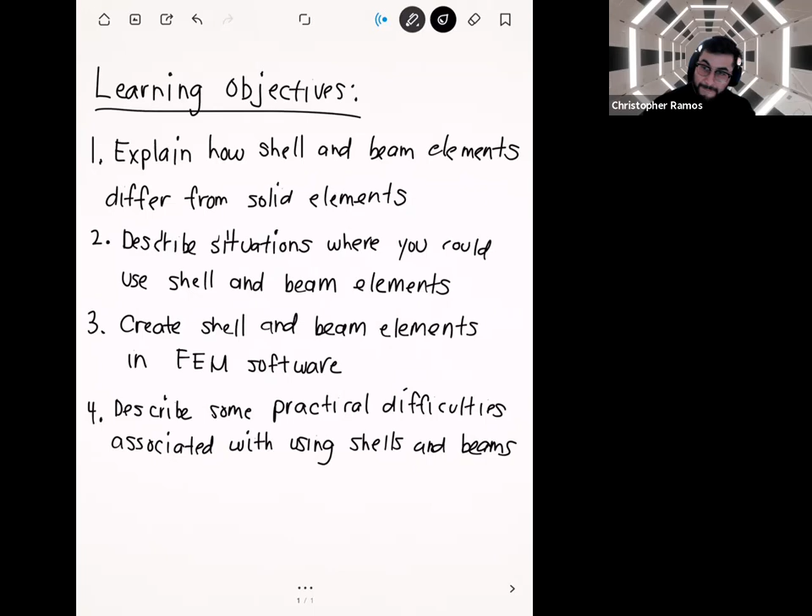That's cool, I didn't know Porter Robinson was playing. Yeah, my fiance said they announced this one kind of last minute. I think he played Friday and Saturday. Would you say it's kind of like EDM music now? Yeah, I mean when my fiance plays it, I enjoy it, but I usually won't listen to it on my own probably.

Man, I haven't smelled that much weed in a long time though. Yeah, I feel like I woke up the next day getting like a secondhand high just from smelling all the smoke there.

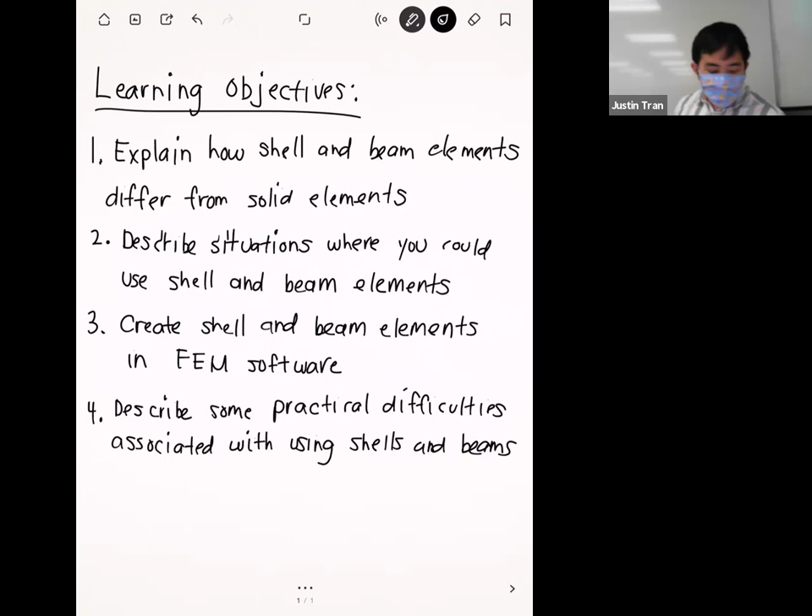The topic for today is shell and beam elements. And my stylus is not working well.

Last week we started talking about different element types, and went over all the different shapes you can have in 3D and in 2D. From here on out, I'm going to assume we're strictly working in 3D, so you'll hear me use the term solid elements. By solid elements, I mean elements that have 3 dimensions of space. In 3D, our solid element types are tetrahedrons - both linear and quadratic versions - and also hexahedrons. They're called solid elements because they actually have 3 dimensions of space.

Shell and beam elements are going to be a little bit different than that. Let me start by talking about the situations where you want to use solid elements, because solid elements are basically 3-dimensional shapes themselves.

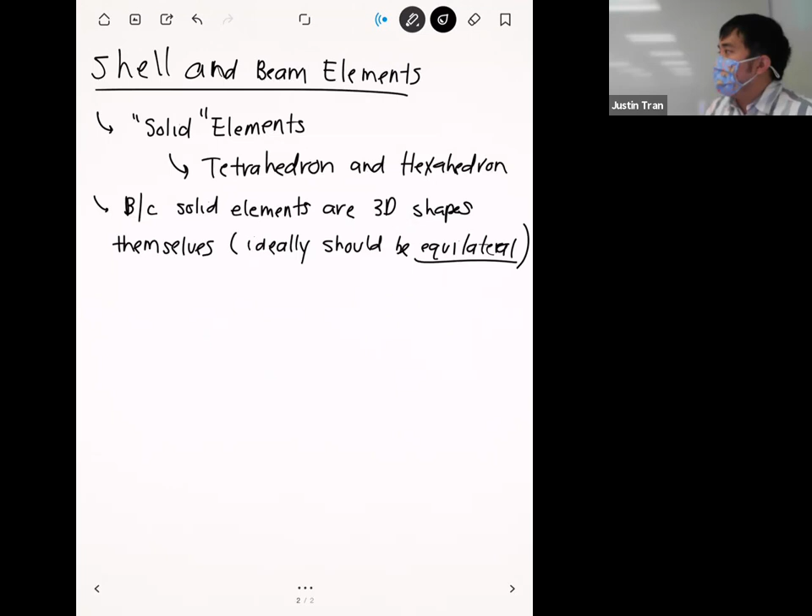Remember when we were talking about mesh quality, we said that ideally you'd want elements to be as equilateral as possible - meaning all the edges, sides, and faces are roughly the same size. Naturally, these elements work well to mesh geometries that are also kind of roughly equilateral.

What I mean is that if you take your object and measure the dimensions in the x direction, the y direction, and the z direction, you're going to get all roughly the same number. It doesn't have to be exactly the same, but they should be in the same ballpark.

If you look at the geometrical properties of your CAD model after opening it up in ANSYS, there's a property called the bounding box - it takes your geometry and draws the smallest possible box that fits around your entire geometry. So when I say your object is roughly equilateral in each dimension, one way to easily check that is the bounding box. If the dimensions of this box are roughly the same magnitude, or at least the same order of magnitude, then it's probably a good object to use solid elements for.

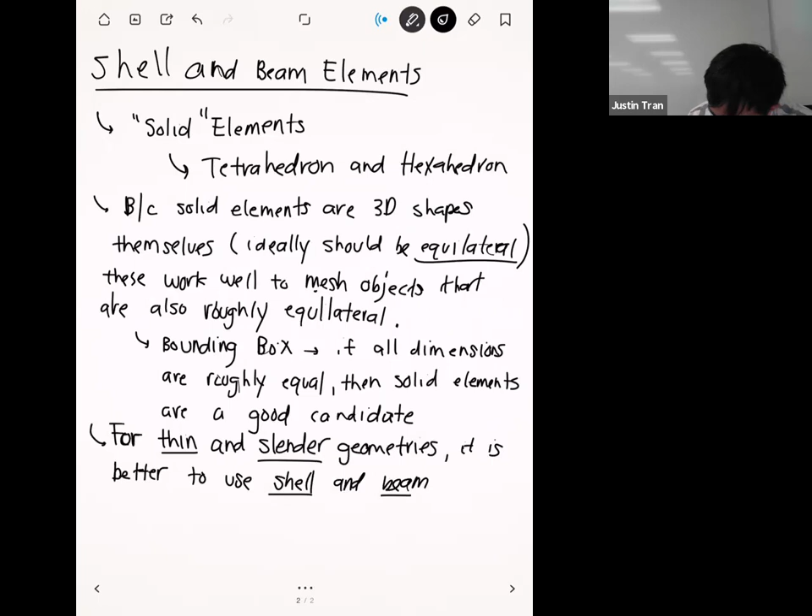The reason for that is, these shell and beam elements are kind of naturally suited to the geometry that you're trying to model. So, from here on, we'll define what shell elements look like, what beam elements look like, and what properties they have that make them really suitable to mesh these certain kinds of geometries.

Thin inner diameter, like thin thicknesses compared to inner diameter and outer diameter. Yeah, no, it's a good question. So yeah, shells are actually a great way to do those kinds of things - you're talking like maybe a thin walled pipe where the inner diameter and outer diameter are very close. Yeah, that's a great candidate for a shell too.

Actually, I did a little bit of research on that when I was in grad school too, where I did simulations of blood vessels, and blood vessels are another type of pipe where the inner diameter and outer diameter are pretty close to each other. So I was actually doing some research where I was trying to use shells to model how the blood vessels kind of breathe in response to blood pressure. So yeah, it's because it's used a lot in pipe flow, and so it makes a lot of natural sense to use it for blood vessels too.

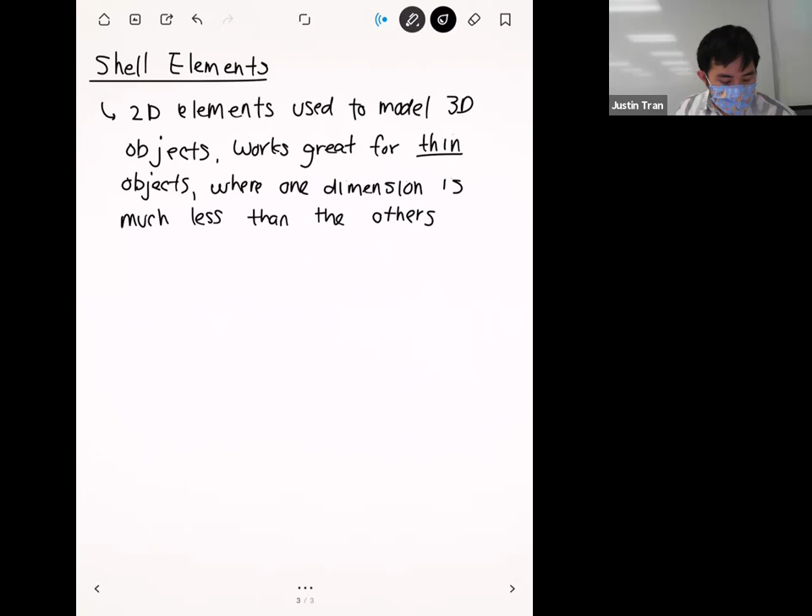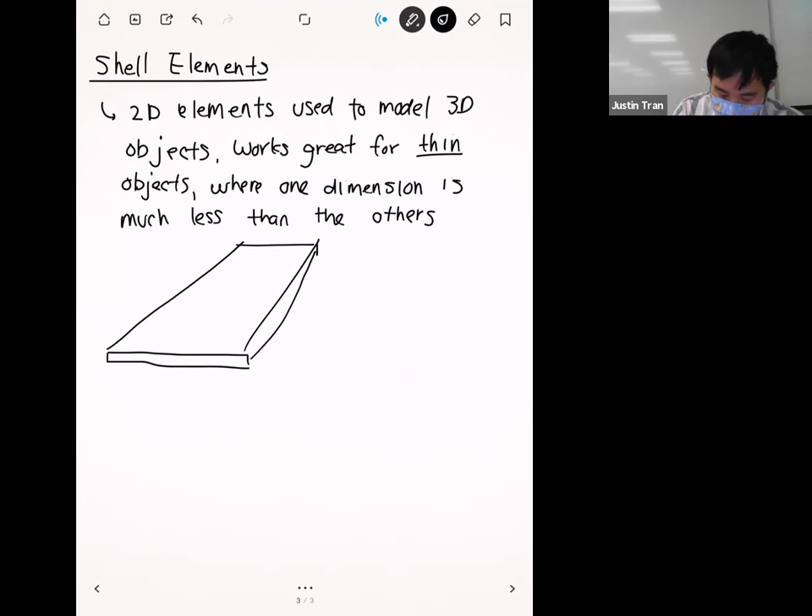I think kind of the canonical example of this is a thin sheet of metal. Let's say that you have a piece of sheet metal here, and let's say that's really thin. So maybe the thickness of the sheet metal might be like, maybe a quarter inch, maybe an eighth of an inch, but it's much longer than it is thick. Let's say that your length here is on the order of meters, and the width here maybe is also on the order of meters.

So what shell elements do is that instead of having this modeled as a 3-dimensional object, we can instead model it as a 2-dimensional sheet. And then we can break up the sheet into 2D elements.

Whereas if we broke up the sheet into 3D elements, maybe it looks something like this - let's say that here we use 3D hexahedrons, whereas here we use 2D quadrilaterals. Let's say that we use the same number of elements in both cases, and imagine that the checker pattern is the same. The one that's going to be cheaper here is actually going to be this one.

Because on a per node basis - and we saw this last week when we were looking at the number of nodes and the number of functions - this is going to be cheaper here. And kind of the magic of shell and beam elements is that in addition to being cheaper, it's actually going to be more accurate too, believe it or not.

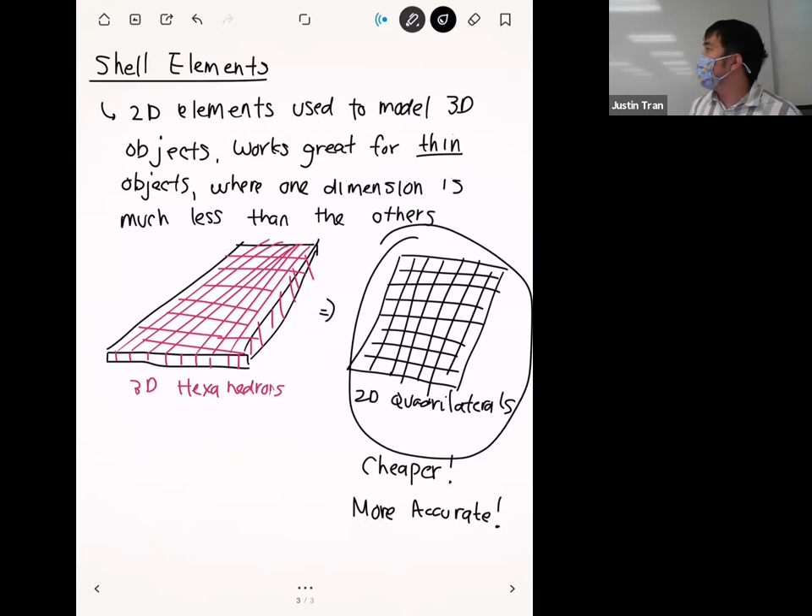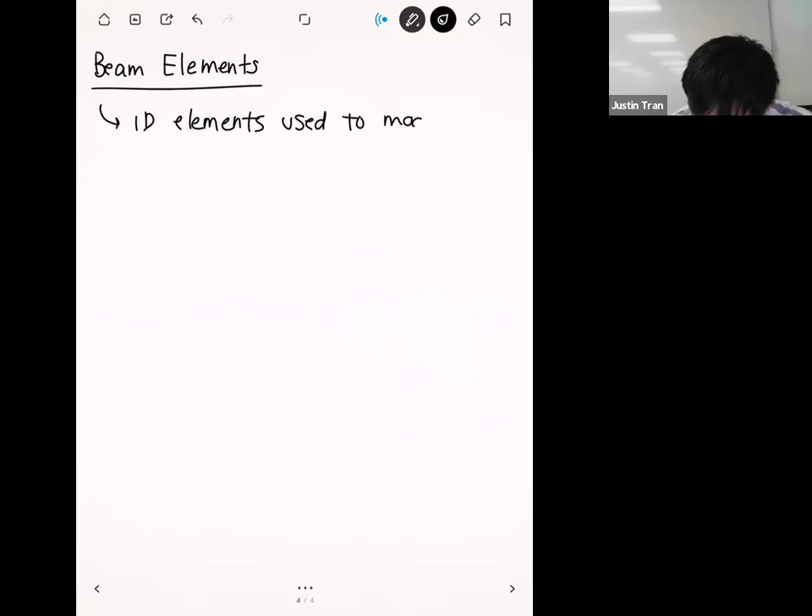All right, so let's talk about beams. So if shell elements are 2D elements used to model 3D objects, beams are going to be 1D elements that we're going to use to model 3D objects. The class of 3D objects that we use beams for are slender geometries.

And so what does slender mean? Slender basically means that you have one length dimension in your object that's much greater than the other two.

And so it looks like a literal beam. If you think of a structural beam for a structure, you have one dimension, the length of the beam, that's much greater than the height or the width of that beam. Just right in front of me, this stylus I'm using would be a great candidate for a beam element because the length of the stylus is like this much, but if you look at the cross section, it's way smaller than that.

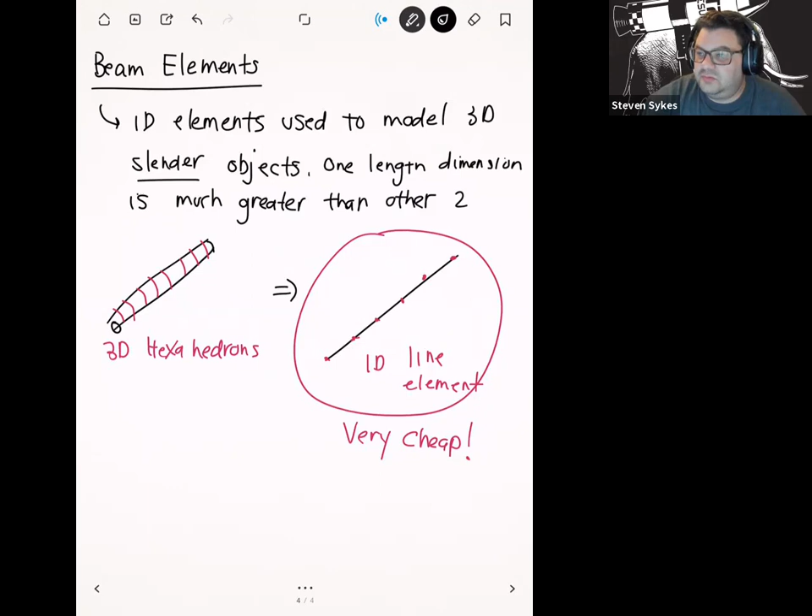Question: is the accuracy about the same for a 1D line element versus 3D hexes? For most cases, on a per cost basis, the 1D line element is actually going to be more accurate, and we'll talk about why on the next page. When you have these thin and slender geometries, there's a very interesting effect where it gets really difficult to compute stresses accurately unless you refine to a crazy amount.

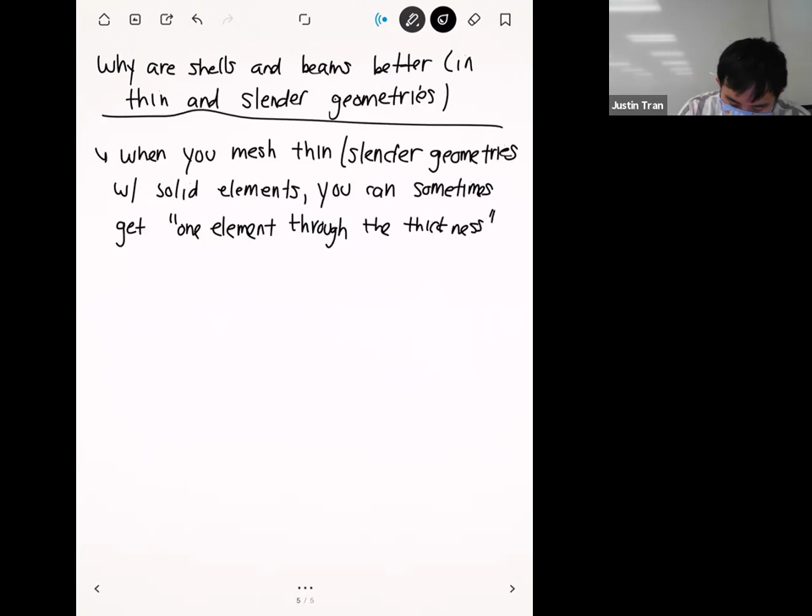Let me draw a thin sheet, just like we did before. By one element through the thickness, I mean that if you put, say, a hexahedral mesh on this plate, your hexahedral mesh is likely going to look something like this, unless you refine it to some crazy amount.

If you look at the mesh density in this direction, we have pretty good mesh density, because if you count the number of elements going across that dimension, let's say we have 1, 2, 3, 4, 5—so 5 elements in this direction. Now let's count the elements in this direction: 1, 2, 3, 4, 5, 6, 7, 8. That's pretty good—even in this simplified example, we're getting good mesh density.

But if you count the number of elements in this height direction, we only have 1. And this is a situation that you actually want to avoid most of the time.

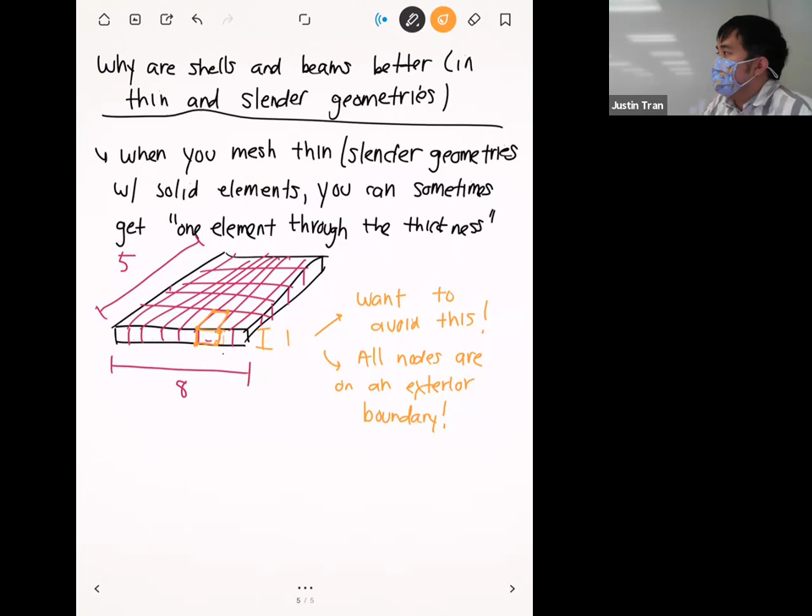So for the last activity that we did, we did a signpost analysis, right? And actually in that one, you have a prime example for both a shell and a beam. For the rectangular sign, that's a fairly thin geometry, so you could reasonably use a shell for that. And then for the post itself, it's fairly slender, much longer than it is wide. In that case, we had a cylindrical post, and the diameter of that post was much less than the length.

And I thought about that too, but I wanted to focus on other things in that example. But you can definitely do that activity with shells and beams, and you'd actually achieve an accurate solution with much less elements than what you did for that activity.

All right, so when you only have one element through the thickness like this, you're going to have a bunch of nodes in the same element, all of it on the boundary. Or another way to say this is that you're not going to have any interior nodes.

And that can be kind of dangerous because what can happen is that when you're just solving for the deformations, you could have a situation where you have a boundary condition applied on the top right here, and then a different boundary condition applied on the bottom. So you're going to have one element that's sandwiched between these two boundary conditions.

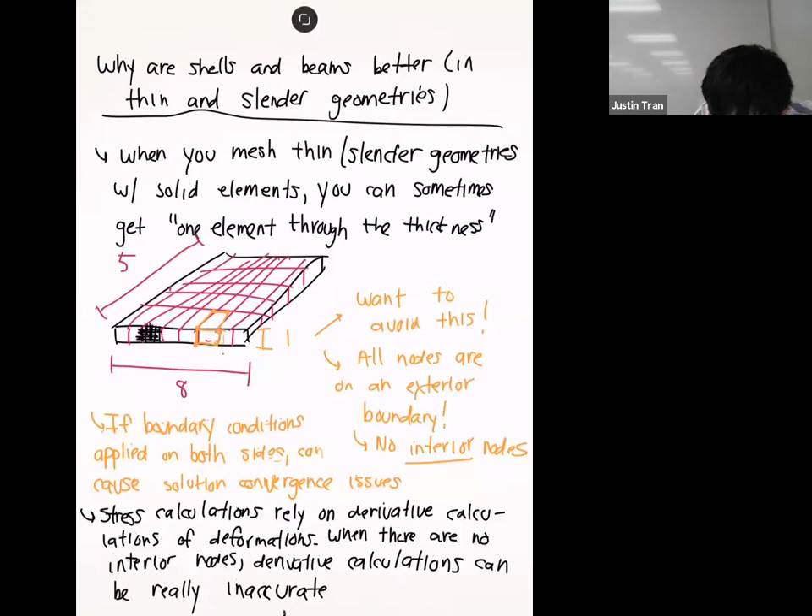So one thing you can do is refine the heck out of this geometry and make the elements as small as possible. So if you refine this like crazy, let's say you have an element that looks like this, that solves the issue because now you have multiple elements through that thin surface.

You can get an accurate solution from this, and there's nothing wrong with that. But where you're going to pay for this is you're going to wait eons for your solution, because you're going to have millions of elements in your mesh, and a lot of times that's not practical.

So the other option instead of using solid elements for these situations is to use your shells and beams. Shells and beams have a kind of unique advantage in their mathematical formulation that makes it so they can compute stresses a lot more efficiently without having to refine the mesh like crazy. Any questions on this so far?

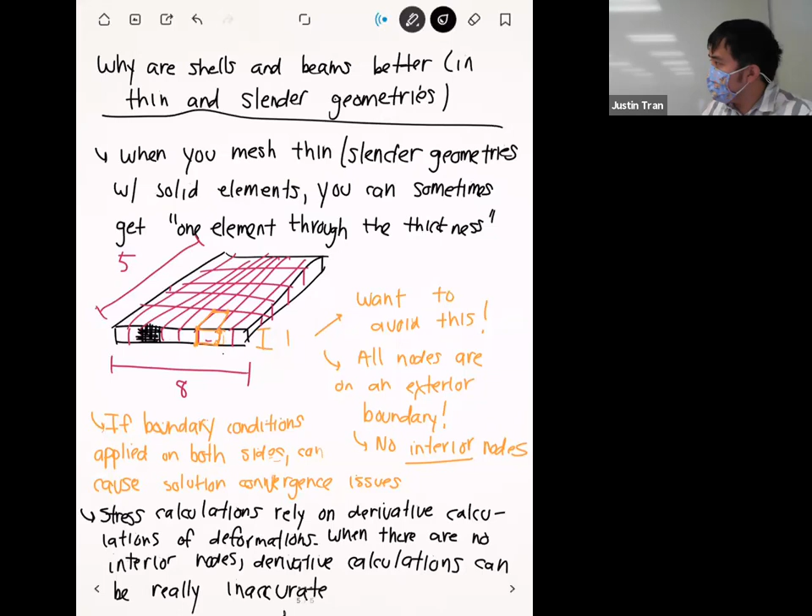Okay, so let's talk about how shells and beams handle this situation. In particular, I want to focus on stress computations and derivative computations.

Shell and beam elements are kind of two peas in the same pod, and they have a very special mathematical formulation. We're not going to get into the nitty-gritty details of what they are, but basically you can think of it as they explicitly solve for these derivatives as part of their formulation.

Normally for a solid element type, like tetrahedrons or hexahedrons, they only solve for the deformations - the X, Y, Z deformations for that element. Shells and beams will also compute these deformations.

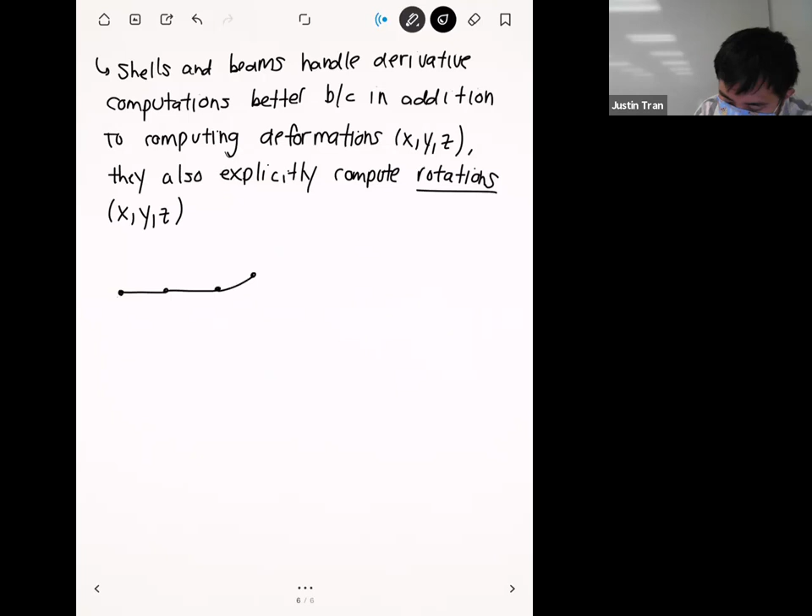So what does this mean? If we take a typical example, I'll do this in 1D since it's simpler. Let's say we have a typical beam, maybe it's deflecting up like this, at this node right here. Normally what we're solving for in a solid element is just how much it's deforming - basically just the raw computation of, after we apply the loads, how far is this node traveling away from its initial location?

Another thing we're also computing are the rotations, which we typically denote as thetas. What the thetas tell you is not only how far this node is deforming, but it also gives you the slope of the beam as it approaches that node.

I drew an example here with the beam, but shells work exactly the same way - you're also going to be computing those rotations. These rotations are literally baked into the beam equations and baked into the shell equations, so it's something the finite element method is actually looking for.

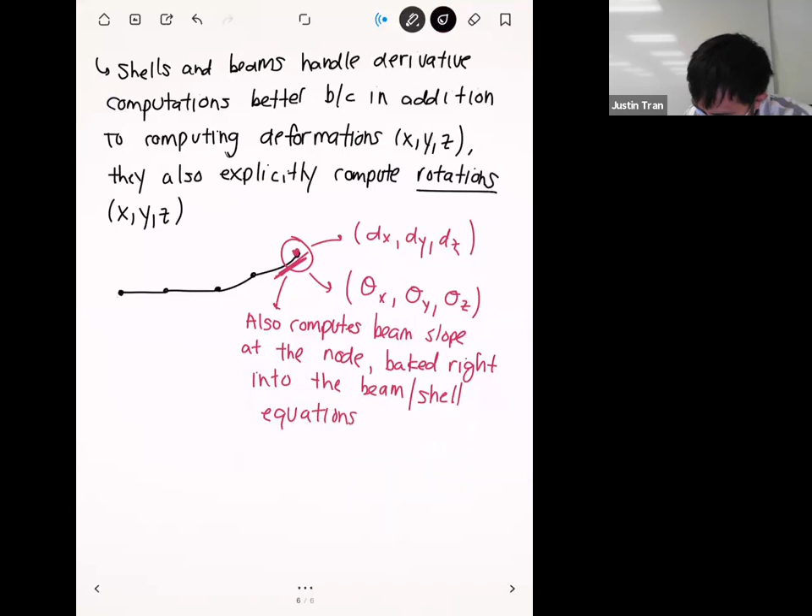Since these rotations are baked right into the equations, we can compute them with much higher certainty. If you think back to our solid elements, when we compute stresses and strains, those are what are called derived quantities - computed after we do the deformations. So their accuracy is naturally less, because we're computing the deformations first, then approximating the stresses and strains based off that deformation.

Whereas for the shell and beam elements, you can almost think of it as we're solving for stress and strain almost directly.

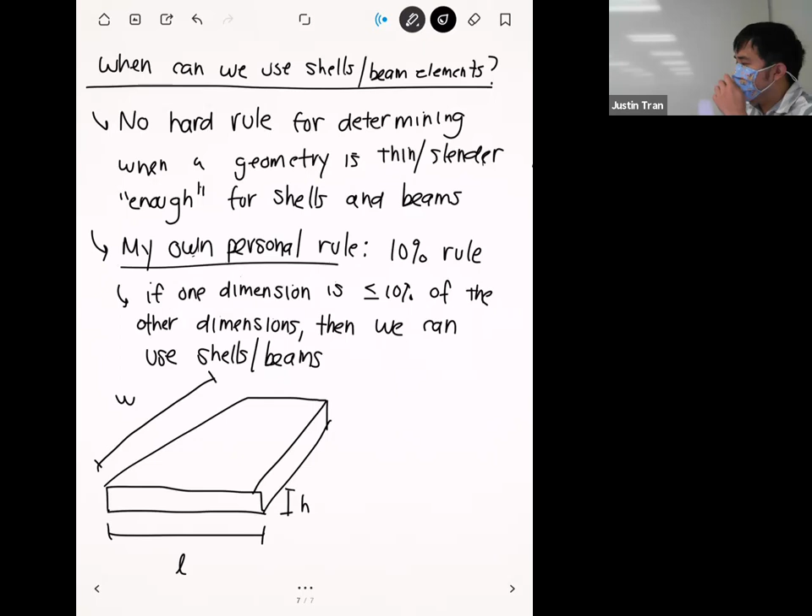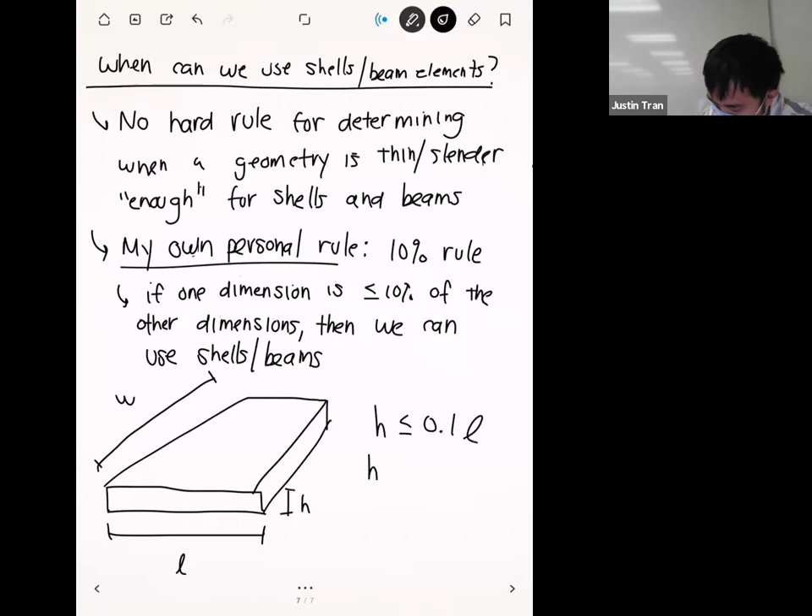So if you draw a thin sheet like this, and we say this dimension is the length, this dimension is the width, and this small dimension is the height, then in order for me to consider this thin enough for a shell, the height has to be less than or equal to 0.1 times the length, and the height has to be less than or equal to 0.1 times the width.

Approximately—these aren't hard numbers. Practically speaking, most of the time I'm just going to look at a geometry and see if it's thin enough or slender enough. But if I were to measure it, these would be the measurements I'd use.

Another example, going off a question someone asked earlier: another good place where you can use shells is for a thin walled pipe. The threshold I used for that was if the difference between the outer diameter and the inner diameter was less than or equal to 10% of the inner diameter, that's when I'd start to consider using shells. Otherwise, I would use solid elements for that.

Any questions on this before we go into how to actually make these in practice?

So these shells or beams don't necessarily have to be extremely small items, like an airbrush gun's needle that's extremely small. It could just be a geometry or shape, like a glass window that just has a very thin width. Yeah, a window would be a great candidate for a shell. It doesn't have to be anything extreme.

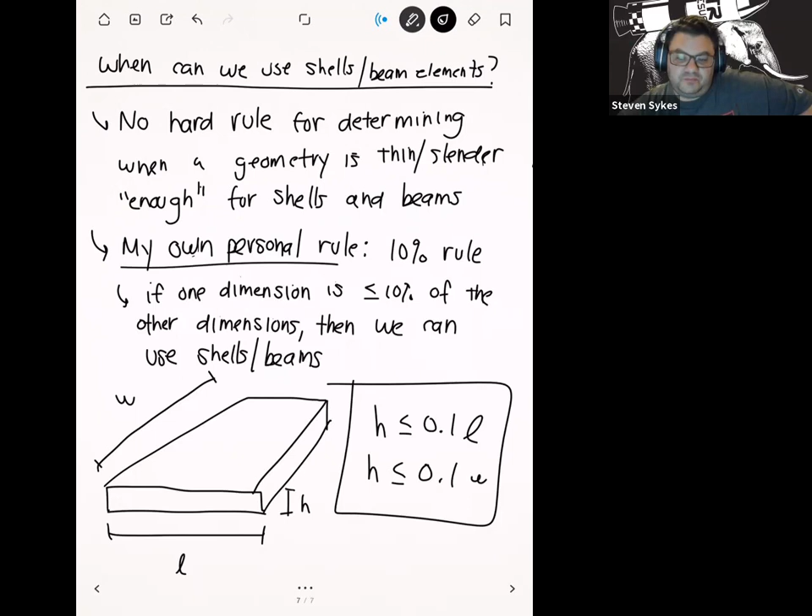For a needle, you're probably talking on the order of like 1,000 to 1 for the aspect ratio. It doesn't have to be that extreme. Usually for me, I use 10%, and it served me pretty well. So it doesn't have to be that big.

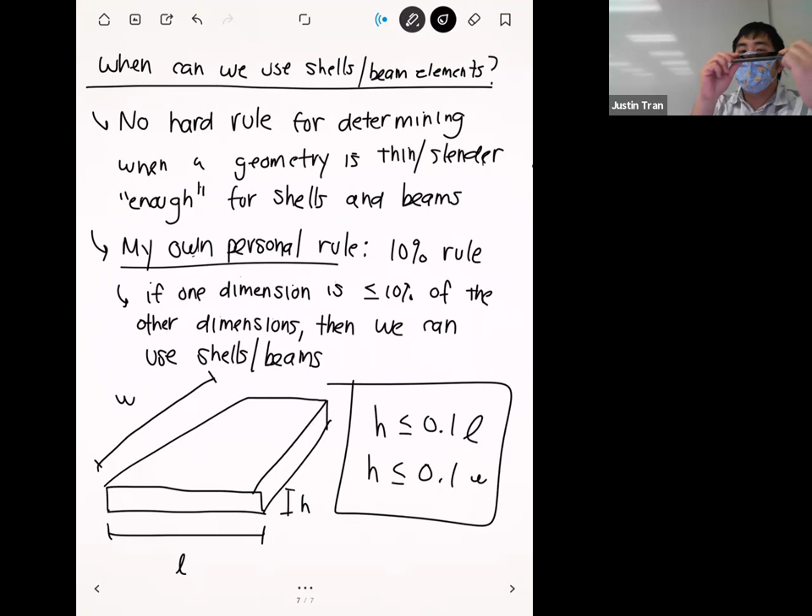Consider your phone - I'll try not to drop it again. If you look at the thickness of your phone, this is probably around maybe 10% of this width, if I had to guess. So if I were to do a finite element analysis on this phone, I would use a shell for it, just because it's a lot thinner than it is wide or long.

Okay, so let's talk about how we actually make these in practice. I want to talk about it a little bit today, and then on Thursday we're actually going to put this into practice through the activity.

So first thing I want to talk about is one other thing that makes shell elements unique, and I should have mentioned this before - one aspect of shell elements is that we're kind of taking a 3D geometry and flattening it. You can almost think of it as we're losing that thickness information.

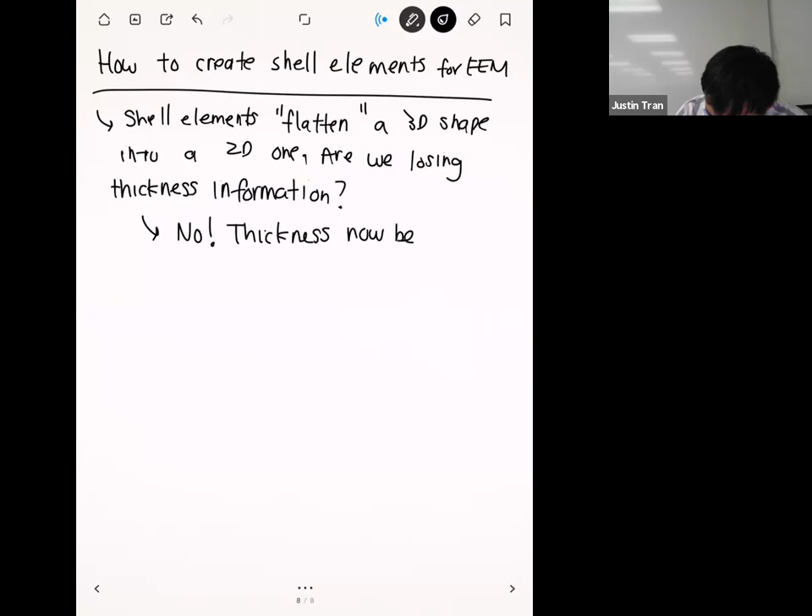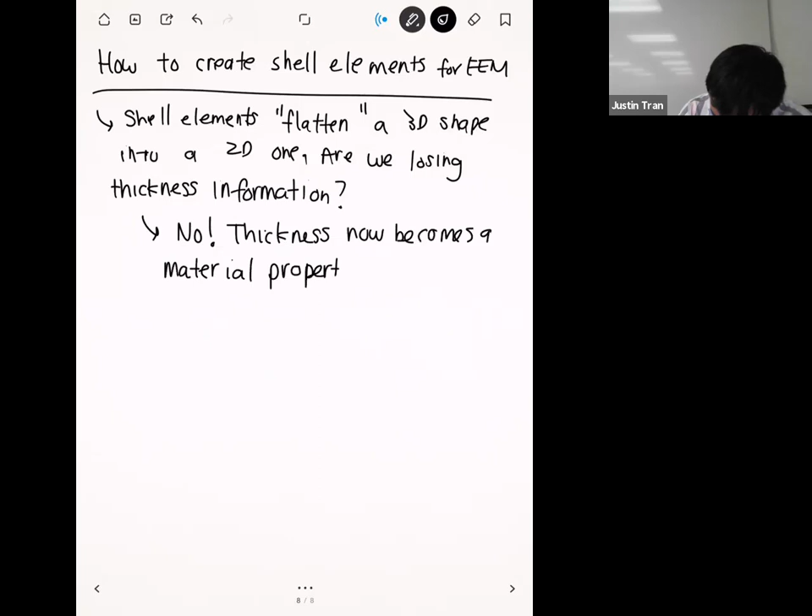Just like we enter a number in for things like the Young's modulus and the Poisson's ratio, for shell elements we also have to enter information - what's the thickness of this shell?

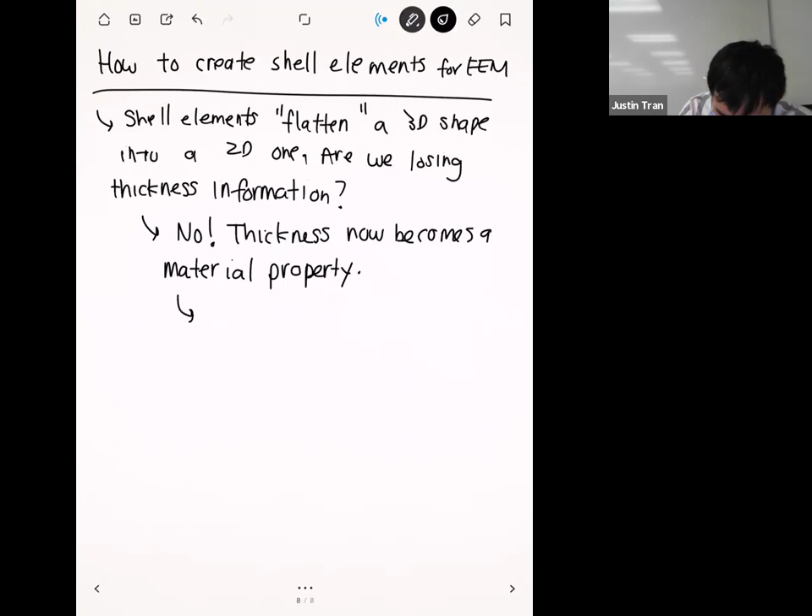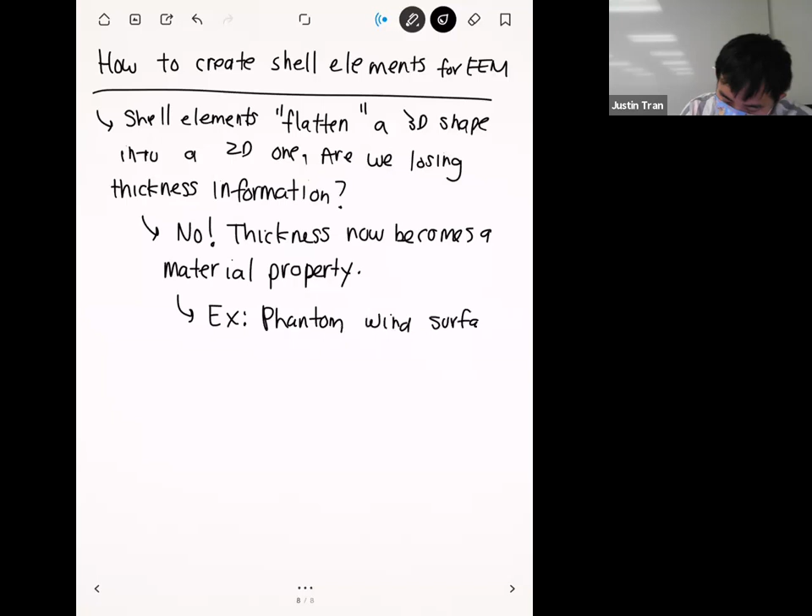Actually, you all have already seen an example of this in action. Think back to our signpost activity - think about the wind application surface on the left, that phantom surface that we had. If you remember, one of the things that we did in the last activity was that we assigned a thickness of 1e minus 3 to this piece of tape, essentially.

In actuality, that thin piece of tape surface was actually a shell, made in the ANSYS CAD software. Before we could actually start using it, we had to assign a thickness, and that thickness was just a number. For other shells, it's the same thing - you have to basically apply the thickness as a material property.

Okay, so with that in mind, let's talk about the 4 methods for how to create a shell element in practice. There are 4 methods here, but in practice you only really use one of them - that one is the most practical, and it's the one we're going to use Thursday too. So let's go over the first 2.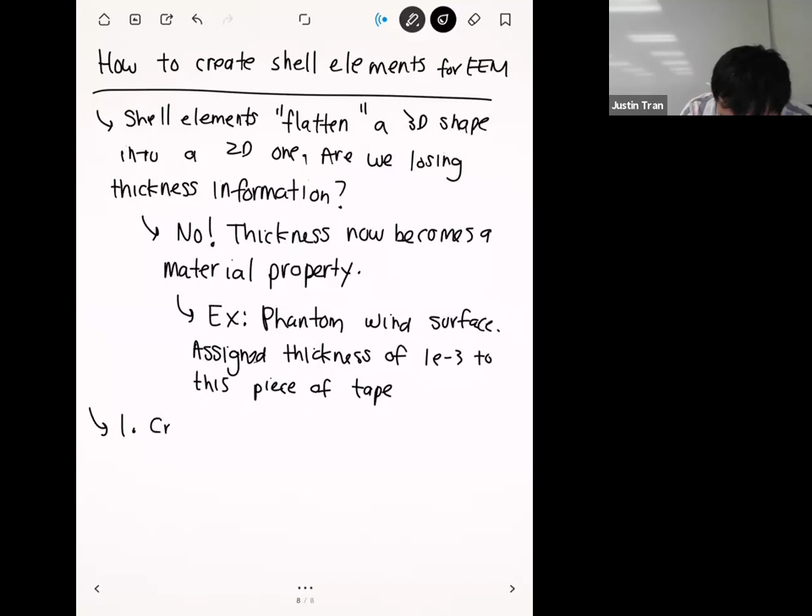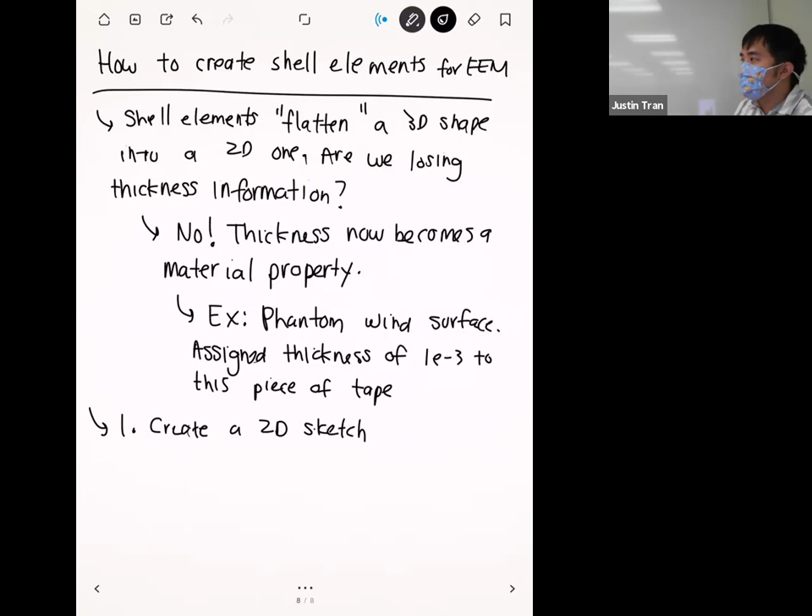The first way that you can create a shell element in ANSYS or any finite element software is to just draw it from scratch. So method 1 is to create a 2D sketch. If you just draw a sketch in 2D, then what you can do is assign it to be a shell surface.

So pretty straightforward. You can basically just draw a sketch and then make it into a shell. If you think back to our ANSYS activity 1, we didn't quite do this because that was kind of a fully 2D simulation. But it's the same idea, right? You basically draw a sketch, and then you say that you want the sketch to be a shell surface. Then ANSYS will say, your wish is my command, and it'll create your shell for you.

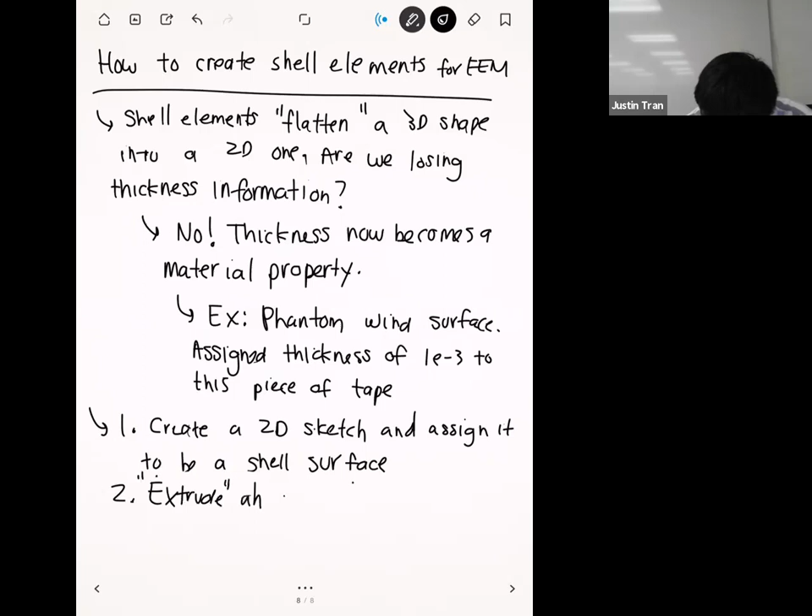All right, method 2. Method 2 is basically what you can do is extrude an open sketch. By open sketch, what I mean is basically a curve that doesn't meet on itself. This can work for any sketch as well, but it can especially work for open sketches too.

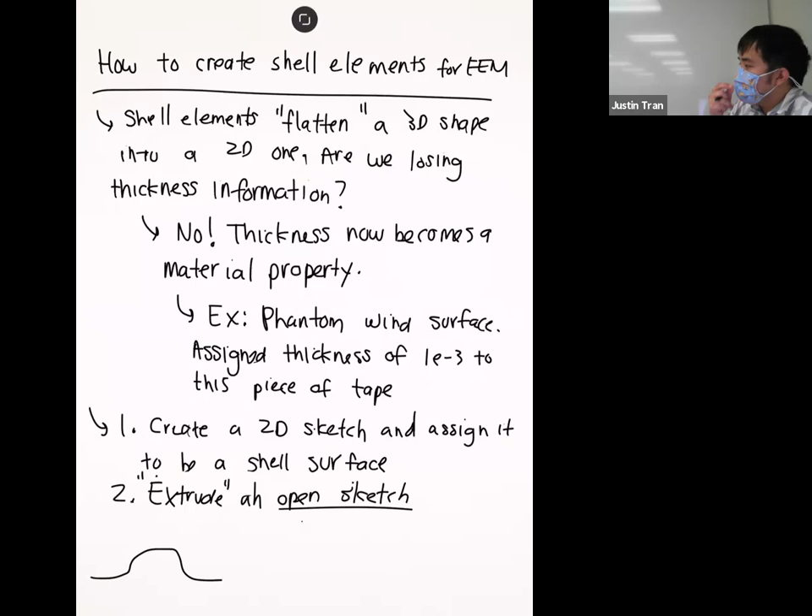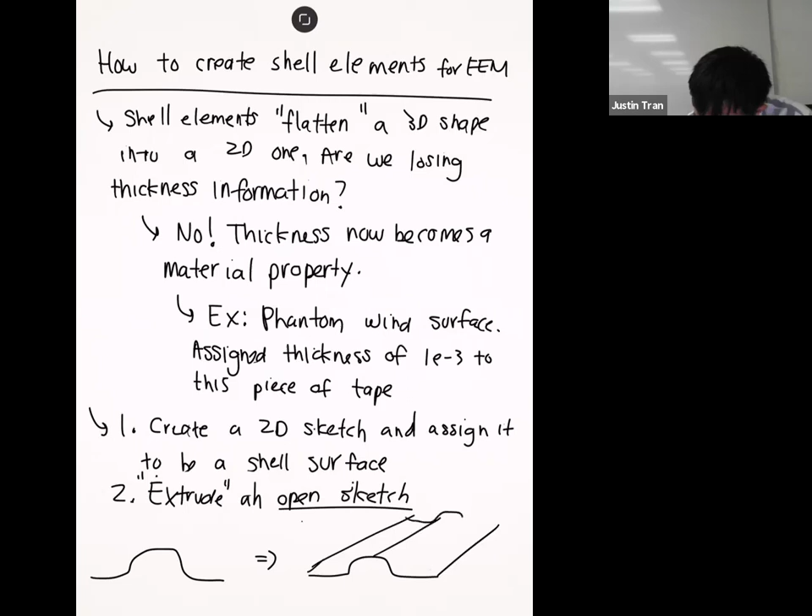Let's say that we draw a sketch that looks like this. It looks like a speed bump or something. You can extrude this into the page, and you end up with a surface that looks like this. That extruded line then becomes a thin shell surface.

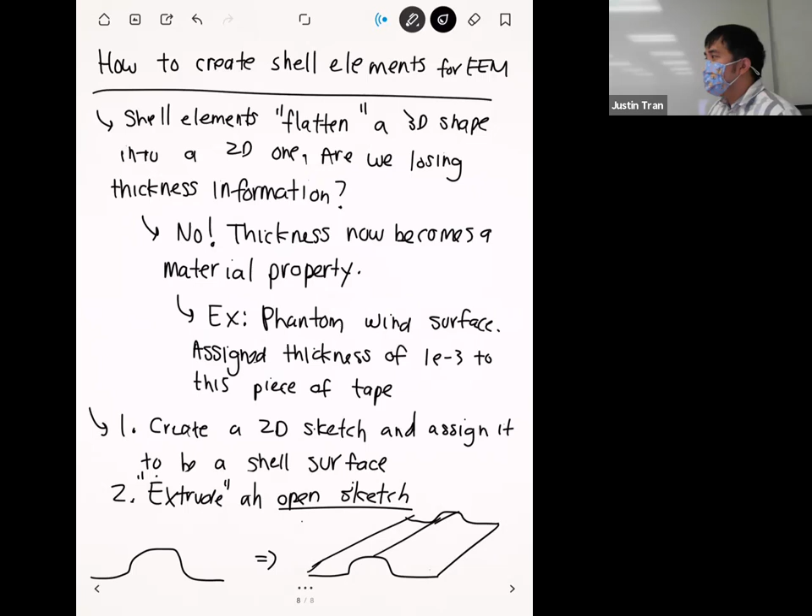Methods 1 and 2, I would say, are probably among the cleanest methods for you to develop a shell element. But you kind of need to plan ahead to use 1 and 2. If you want to use 1 and 2, that implies that you're making your CAD geometry from the ground up with the intention of using shells and beams. So if you have the foresight, or probably more rarely, if you're in control of the CAD model that gets produced, then you can use methods 1 and 2.

But what can happen a lot of times in companies is that, as the stress analysis or finite element engineer, you don't really have control over the CAD model. Some other engineer might produce it, or maybe you're producing it, but you have to use it for other purposes, like for rendering and for showing off the part and for design and machining purposes. So for those cases, you're probably not going to use these first 2 methods because you're making your CAD with other intentions in mind. Method 3 is probably the most common way that you can use to create shells. Any questions on this so far?

Yeah, so then for like a cylinder, or for example, like that thin wall pipe, would that essentially just be like a square almost, with fillets on the side?

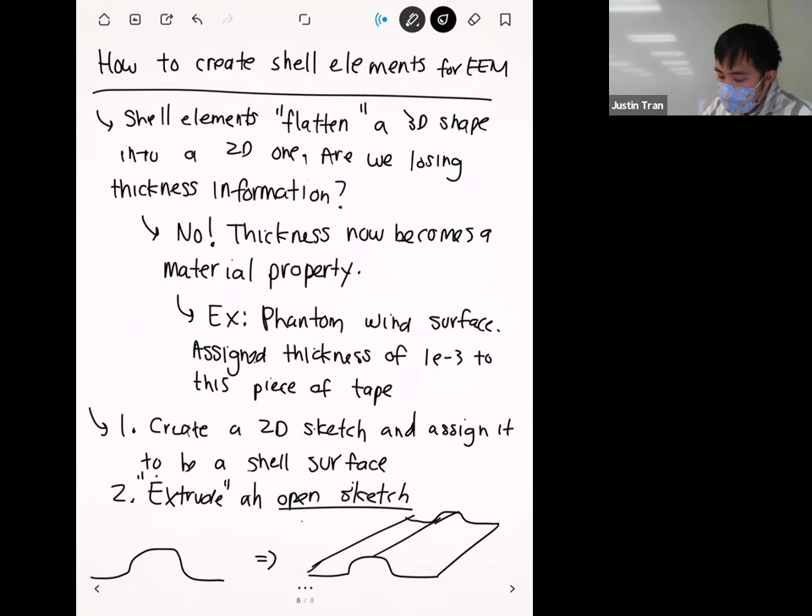Yeah, so for a pipe, that's why I said you can do this for a non-open sketch too. For a pipe, you can draw a circle. You can extrude this too, but you have to be careful that you don't use the regular extrude. If you use a regular solid extrude, you're just going to get a solid pipe. You have to use, I think it's called line extrude or shell extrude or something like that, in order to get a thin wall pipe from this. So you can do this with closed sketches too, you just have to be careful about the extrude function that you use.

All right, let's go over method 3. We are running a little bit short on time, and I want to make sure I get to the beams too. Method 3 is called a mid-surface operation.

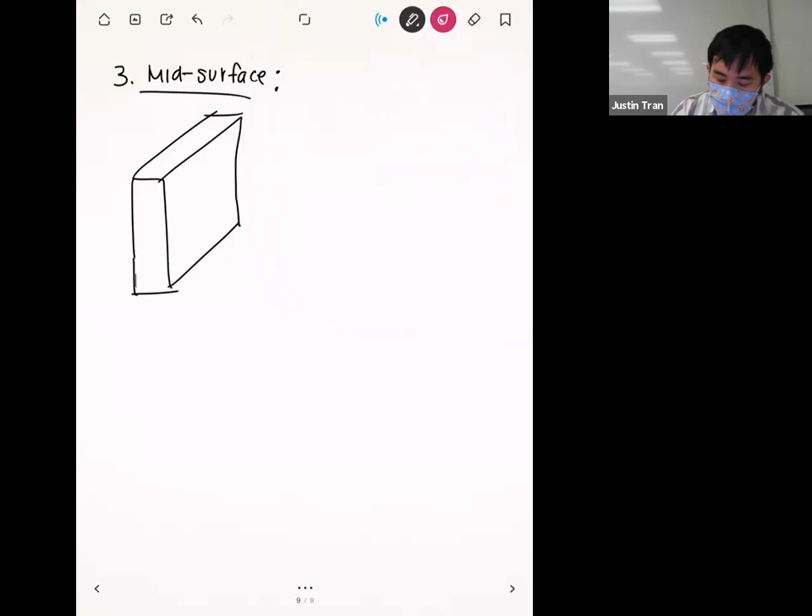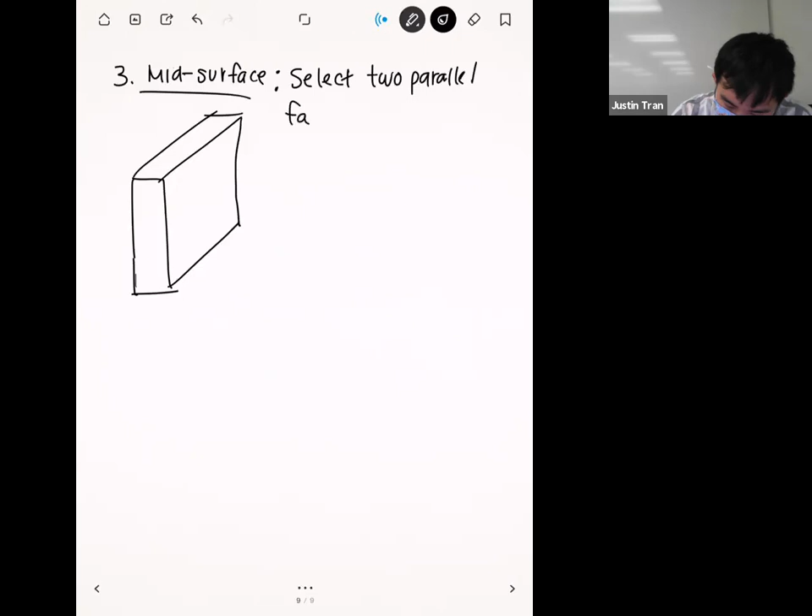For a mid-surface operation, what you're doing essentially is that you're going to look at a 3-dimensional part that may be really thin. Let's say that you have a CAD model, and this is one region in your CAD model where you can say that this is a fairly thin geometry. For a mid-surface operation, what you're going to do is select two parallel faces. Ideally, these two parallel faces should be pretty close to each other. If they aren't close to each other, then your geometry probably isn't thin at all.

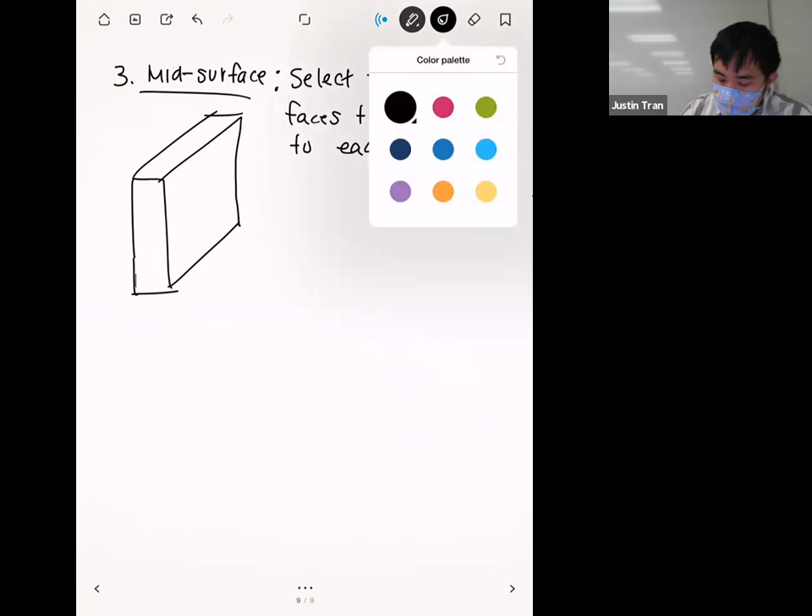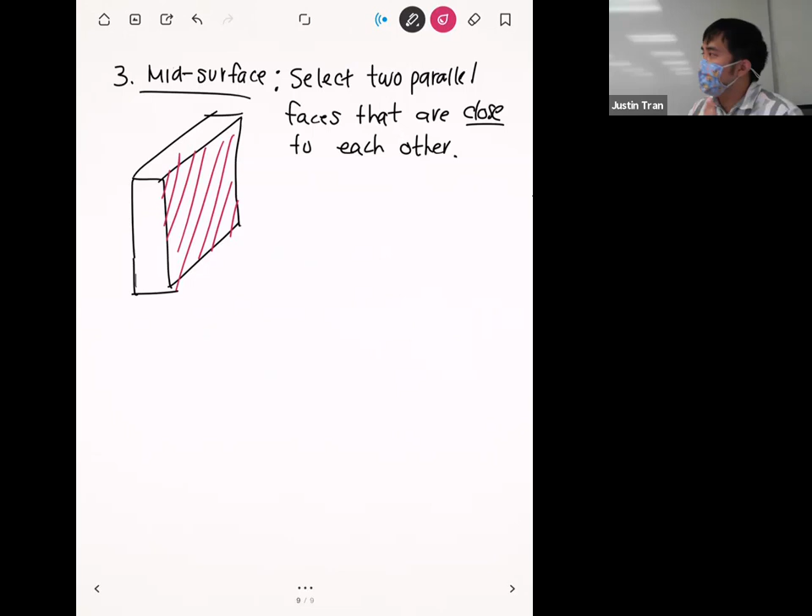So for this surface here, let's say that we have this surface in red. And then we have the adjacent surface in the background of this thing, that I can't draw because I can only draw things in isometric view. So what's going to happen is that when you select these two parallel faces, you're going to basically create a shell that is placed right in the middle of these.

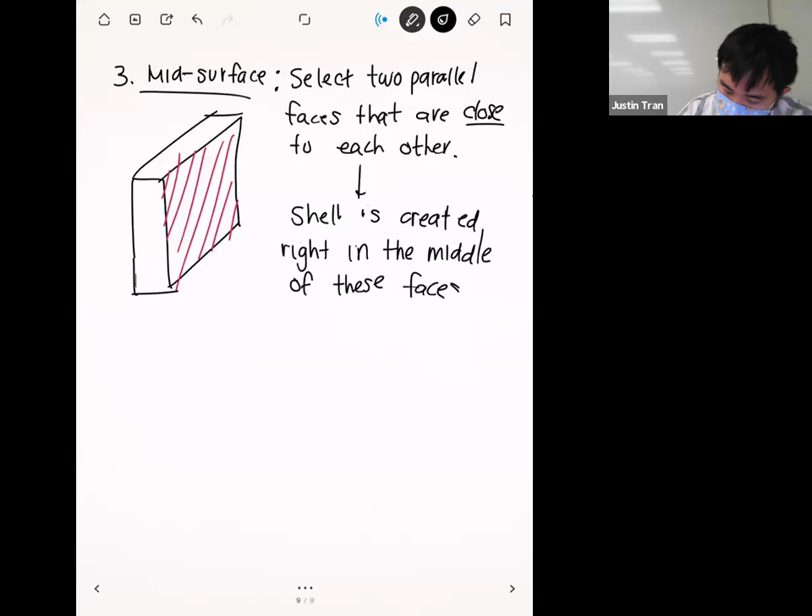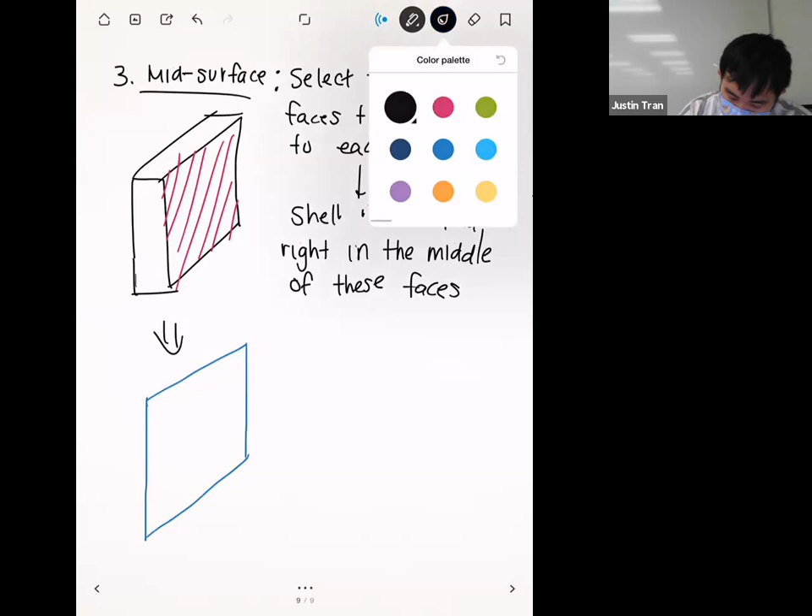Hence the name mid-surface. You basically create a shell surface right in the middle of these two. And so what you end up with is something that looks like this. In the middle of those two, you're going to create a shell. Remember, it's a 2D sheet. And then around that is the 3-dimensional object that used to be there.

This method works for an existing CAD model. That's why this is pretty popular, because someone else is going to create your CAD model, and if you see two surfaces that are pretty close, you can then just create a mid surface that goes right in between.

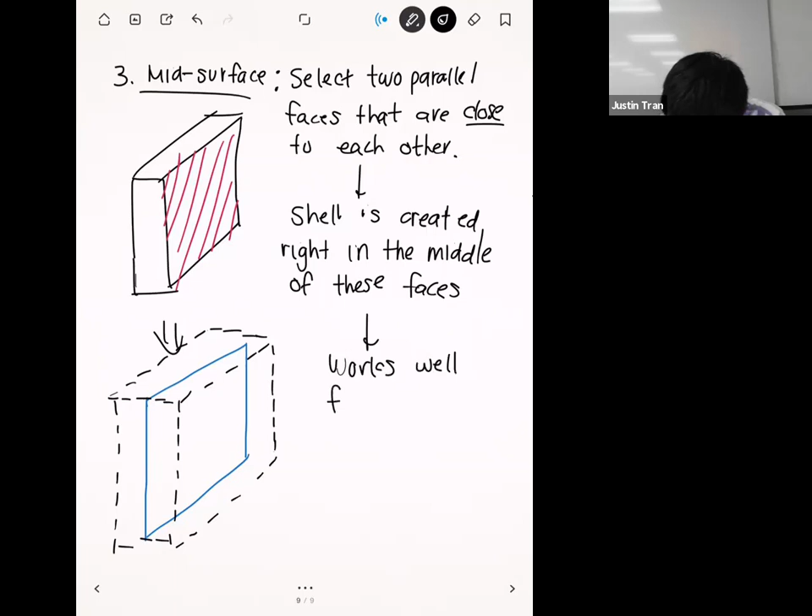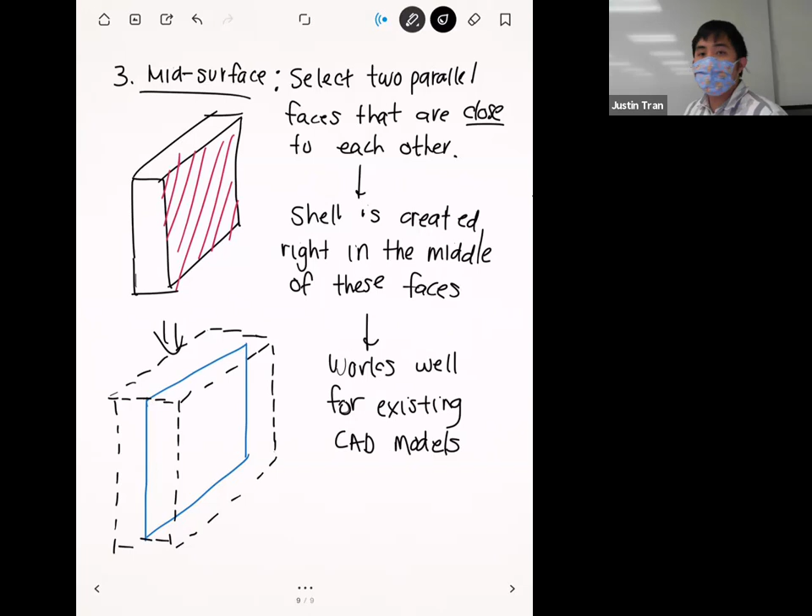Any questions on this? So this is what we're going to do on Thursday. For the thin parts of our geometry, we're going to use a mid-surface operation to create a shell in the middle of it.

So there is a fourth method to create shells, but I am going to skip it in the interest of time because I do want to talk about beams. The fourth method for creating shells is actually not that commonly used. It has very niche uses, but I've only really used it as kind of a fun thing, so I wouldn't worry about it too much. But if you are interested, we can talk about it on Thursday. I personally have never used it for anything practical. So let's talk about beams because I want to make sure we get through that today.

Remember, beam elements are 1D elements. By creating these 1D elements, we're going from basically a 3-dimensional object down to a 1D one. We're losing not just one, but we're losing 2 dimensions worth of information.

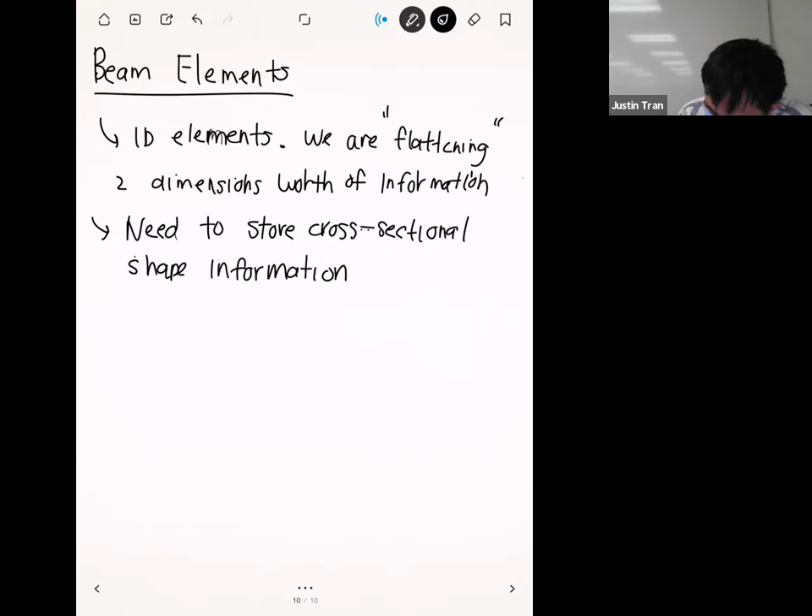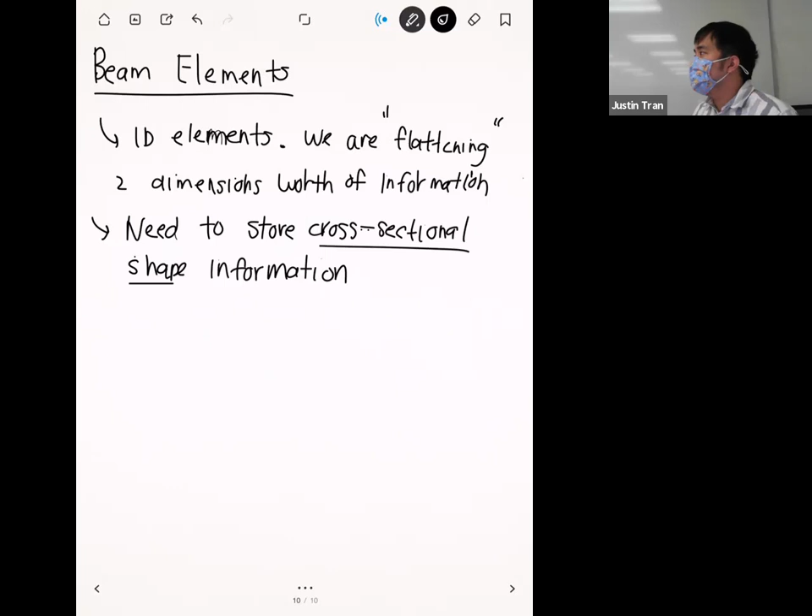If you looked at several cylinder objects used in engineering, there are lots of different cross sections that are used. You have a basic cylindrical cross section, which is just a circle. You can have the famous I beam. And you can have L beams too. I spelled oil unintentionally, but I guess it's there. It doesn't mean anything, it just happened to be OIL.

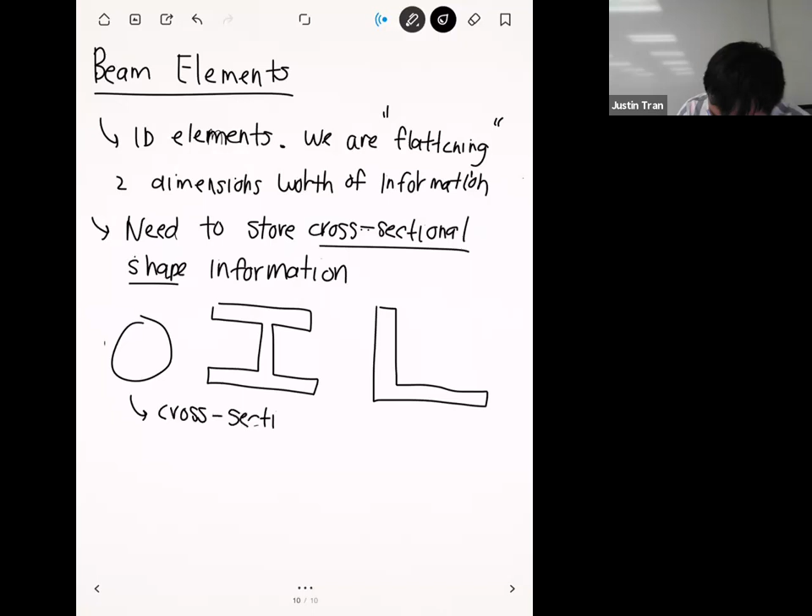As you all probably know, the cross-sectional shape of the beam has an influence on its solution. One major way that the cross-sectional shape makes a difference is in the computation of the moment of inertia.

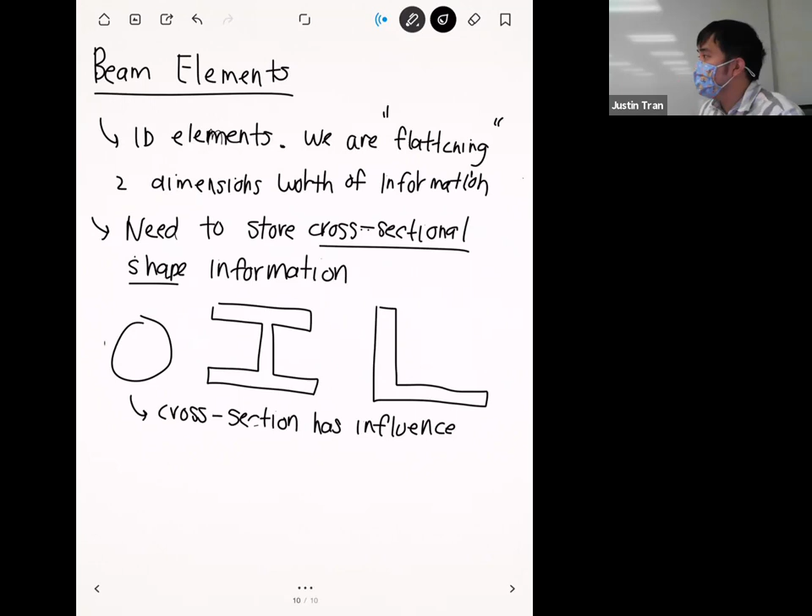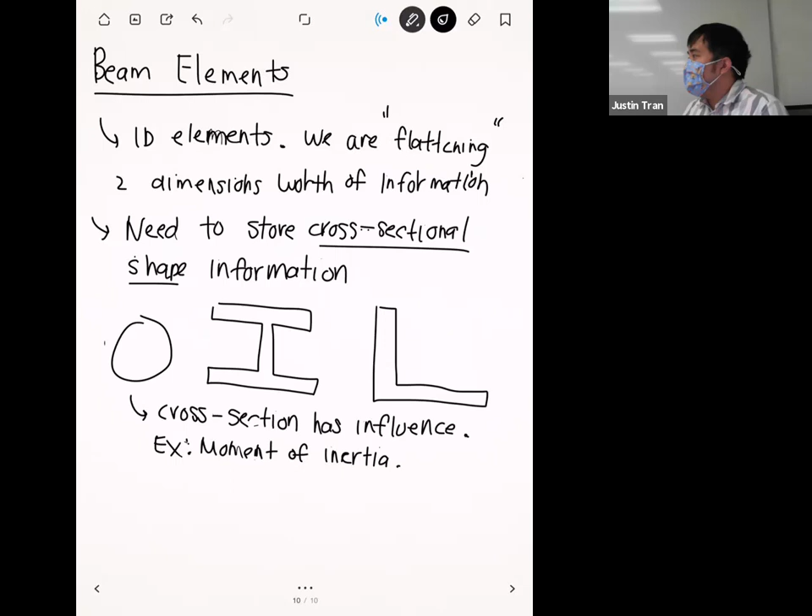If you think back to beam theory, which we talked about earlier in this class too, in order to compute our beam theory solutions, we had to know the moment of inertia. But since these beams are going to be loaded in kind of an arbitrary way in 3D, you need to know the moment of inertia in all different directions. The way this is usually handled in a finite element software is that whenever you make a beam, you also have to draw out what the 2D cross section looks like.

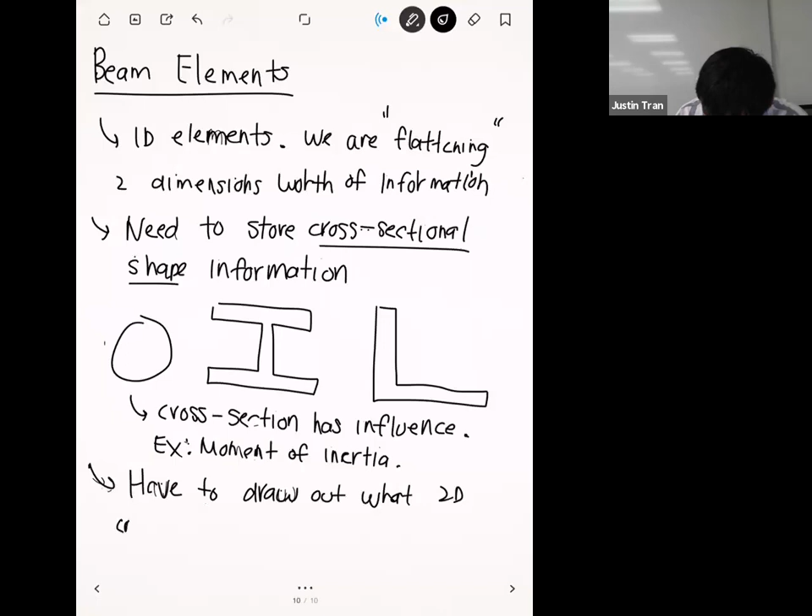Because ANSYS, or any finite element software, needs to know that in order for you to compute the solutions, and in order to solve the beam equations, you need to know what that cross section looks like. So if you're creating your beam from scratch—and we'll go over two methods for creating beams in practice—you actually have to open up a new window where you sketch out what the cross section looks like with all the dimensions listed in there.

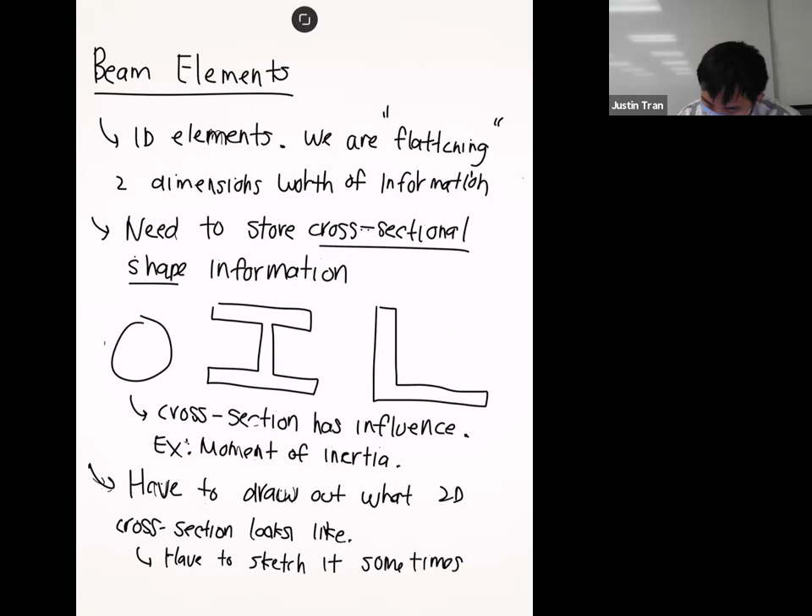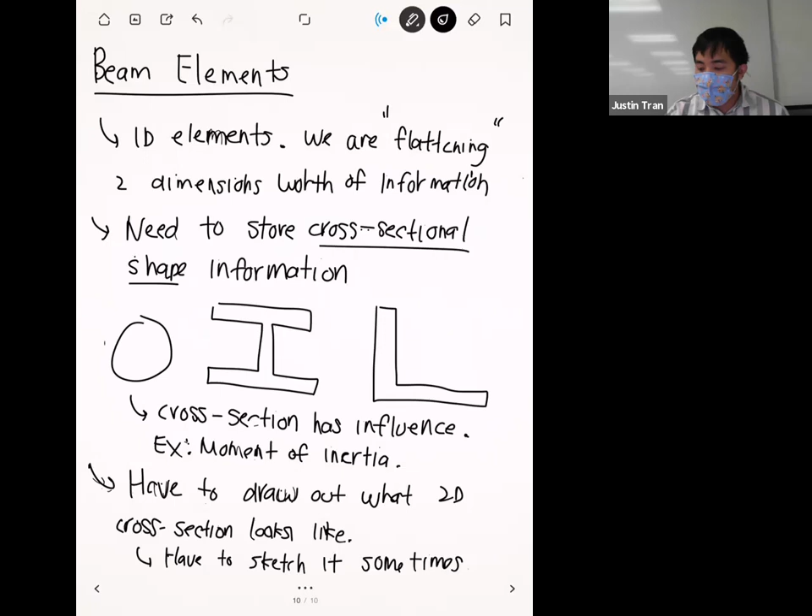Any questions on this? All right, so quickly, let's go over the two main ways to create beams. They kind of have similar applications as the two ways, or the several ways, that we create shells too.

We have one method that can be very clean, but you also have to plan ahead for it. Method one is to basically define a line, or sketch a line. You would sketch this line in your CAD software—you can do this in ANSYS, or you can do this in SolidWorks. And then once you've drawn your line, you basically assign it as a beam.

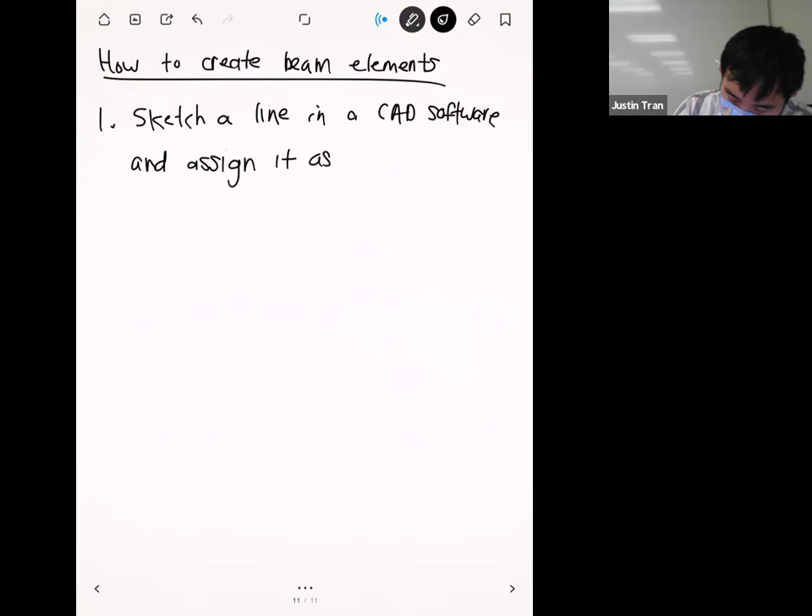So that's method one. Method one works great if you can plan ahead and have control over the CAD, but most of the time you don't. Most of the time you're given a CAD model and you notice there are slender geometries in it. So what you can do is extract beams from certain parts. And that's what we're going to be doing on Thursday.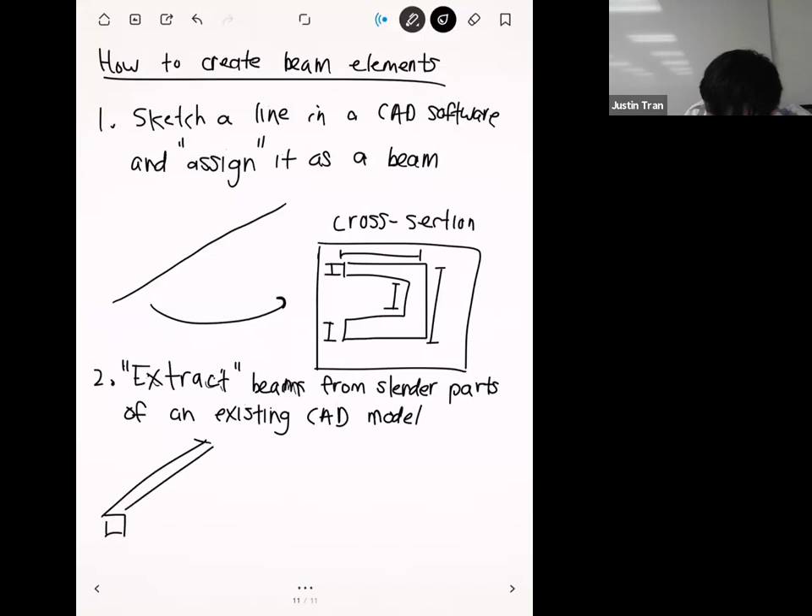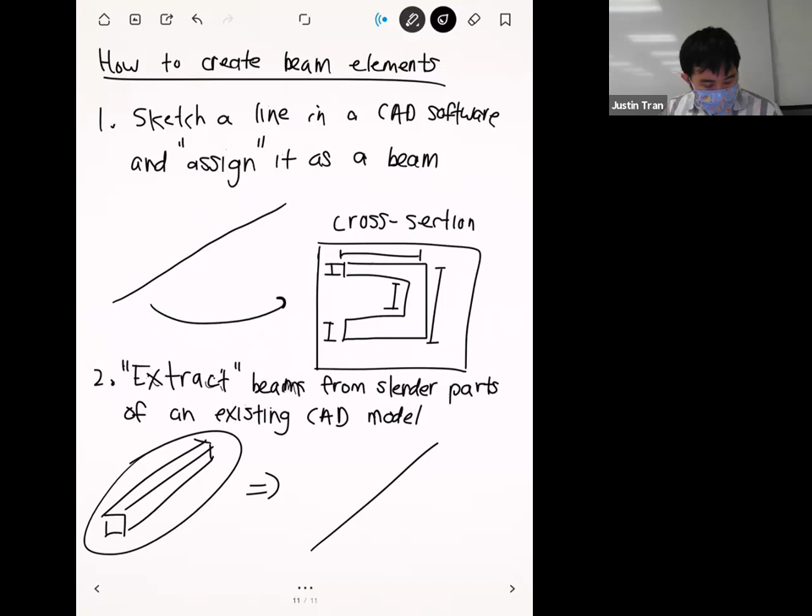Let's say you have a thin, square beam like this. This part is actually pretty easy, because all you have to do is open up the extract tool within your CAD software and point and click at a place where you want a slender geometry. Most of the time it's pretty smart, and it'll say, okay, I see you've clicked on this geometry right here, let me go ahead and create a beam element for you. It's pretty nice, actually — you can just click, and it'll turn certain parts of the geometry into a beam.

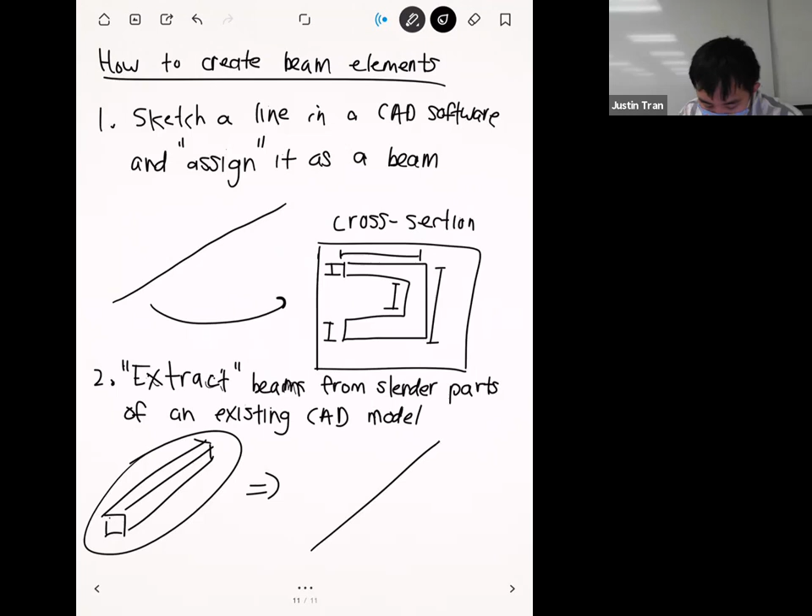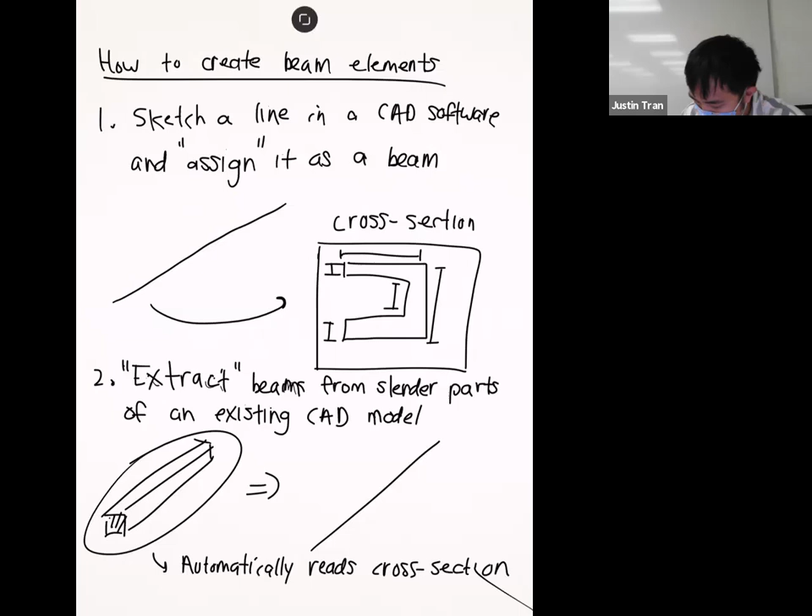The nice thing about the extraction method is that it'll automatically read what the cross section looks like, so you don't have to assign it yourself. It'll pick it up straight from the CAD model. It's really just point and click, and then you're done.

Any questions on creating beams in FEM? Okay.

We're just about out of time, but I wanted to say one thing before we leave today, because everything we went over with shells and beams seems great, right? It seems like we should use them all the time. The thing I didn't really tell you is that when you actually create them in practice, it can be really annoying to deal with the CAD. You'll see this Thursday — it's not all sunshine and rainbows with shells and beams. Often when you start doing mid-surface operations and beam extractions like this, your geometry might not connect to each other like it used to. Some parts that should be connected are suddenly not, so you'll need to do a lot of cleanup on the geometry to get it back to a state where you can actually run finite elements. So there is some work involved. If you can use shells and beams, they work great, but sometimes they can be a little annoying to work with too.